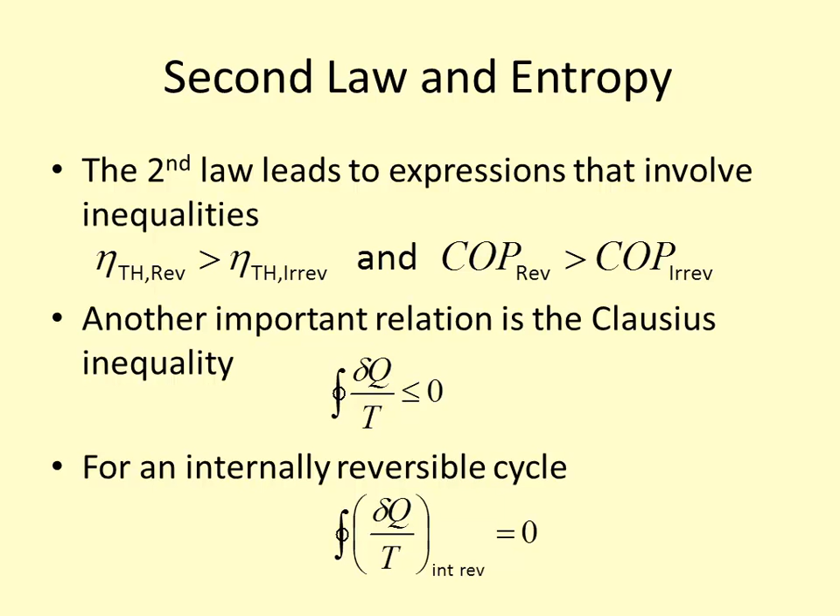So let's just imagine that we have two devices. One is what? What does that look like to you? Okay, a heat engine. How do you know it's a heat engine and not a heat pump? Okay, so there's some net work output on this reversible cyclic device. In this case, we're assuming it's operating as a heat engine, so there's some net work output, and there's a heat addition, δQR at TR, and then there's some heat rejection, δQ.

We're going to assume that this heat rejection goes straight into another system, which allows it to have some net work out or in. Okay, so we're not powering, but adding heat to this additional system with our rejection process from this heat engine. Okay, so this is an imaginary system. If you look at the system boundary right away, what do you notice?

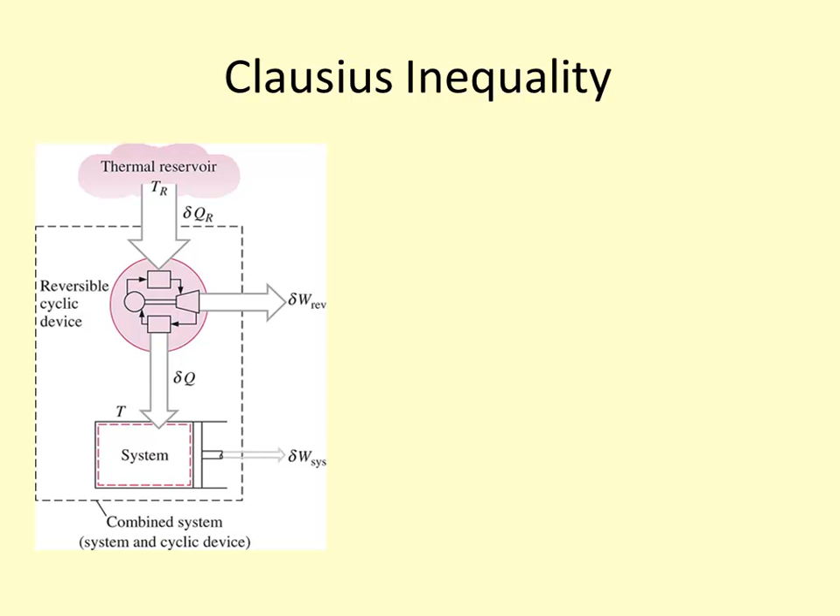Yeah, work out, no work in. Okay, there's no work in, there's a heat in, but there's work out. Okay, so would this be possible in real life? No. Okay, so this combined system is theoretical, and we're going to use it to prove the Clausius inequality.

So if we apply the energy balance to this system, we have some net work of the combined system, this del work out, is equal to this Q in minus the change in energy of this combined cycle. So we've kind of rearranged that. It would be dE is equal to del Q minus del work.

If it's a reversible cycle, then this del QR over TR is just equal to del Q over T. We're just going to call it that. If we want to solve for this del QR or this del Q over T and we substitute, then we say that the combined work of this cycle is equal to this del Q over T multiplied by TR. So we've just substituted in this del QR is equal to TR times del Q over T, minus the change in energy of this combined system.

And if we integrate over a cycle to get the total work, then the work of this combined system is equal to TR times the cyclical integral of this del Q over T. Okay, so right now we're just playing around with the math using this combined cycle to come up with something that's useful to us.

Okay, the reason this dEC goes away is why? Do you know? Okay, if it's integrating over a cycle, the change in energy of this combined system should be 0. It should return back to its initial state. So that's how that disappears. Okay, so all we've done is just take the energy balance on this combined system that's theoretical, and we've already seen that it can't possibly happen, and then we integrate over a cycle. So we're just playing around with the terms in it.

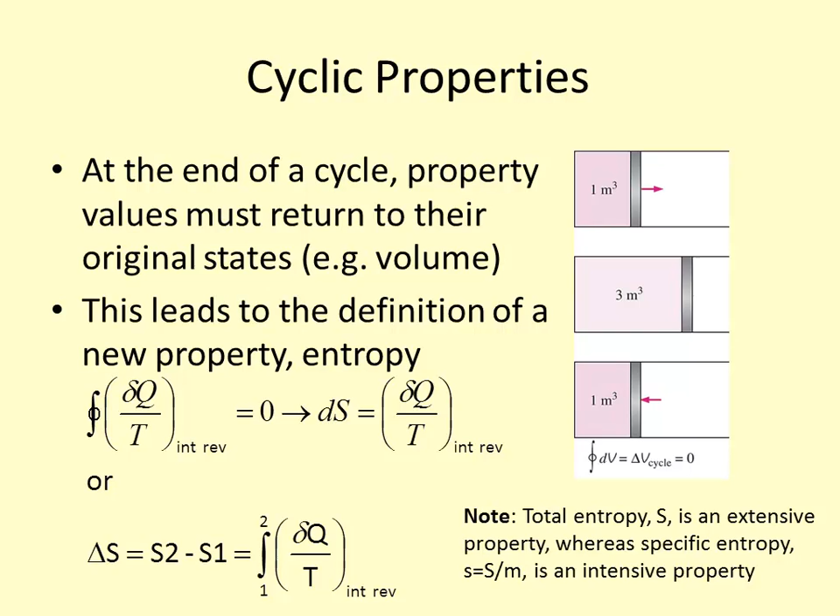Okay, so what is it? Well, it's useful to us when we perform our second law analysis, because we can assume that if a process is to occur in real life, later we'll learn that the entropy has to increase. Okay, the entropy of the system might decrease, but the entropy of the surroundings would have to increase by at least as much. So it's useful in determining whether or not a process is real, because if it doesn't satisfy this increase of entropy principle, as we'll talk about later, then it can't happen. So it's another way to put it to the test to see if the second law holds true.

We can also consider entropy to be like molecular disorder or randomness. And when we look at gases, they're in a very high energy state. So they're useful to us in terms of availability to provide energy. But because they're so disorganized and random, sometimes it's difficult to harness that energy or to use it in a way that provides value to us.

So sometimes substances that are in a high energy state also have a high entropy state. And so the release of entropy into the environment when we use these high energy materials for our system is sometimes greater than if we were to use the lower energy state materials. Okay. And again, we'll get a little bit more into this. I think chapter 7 is probably the longest chapter in the book, and we spent several weeks on it. So this is sort of just the introduction to the concept.

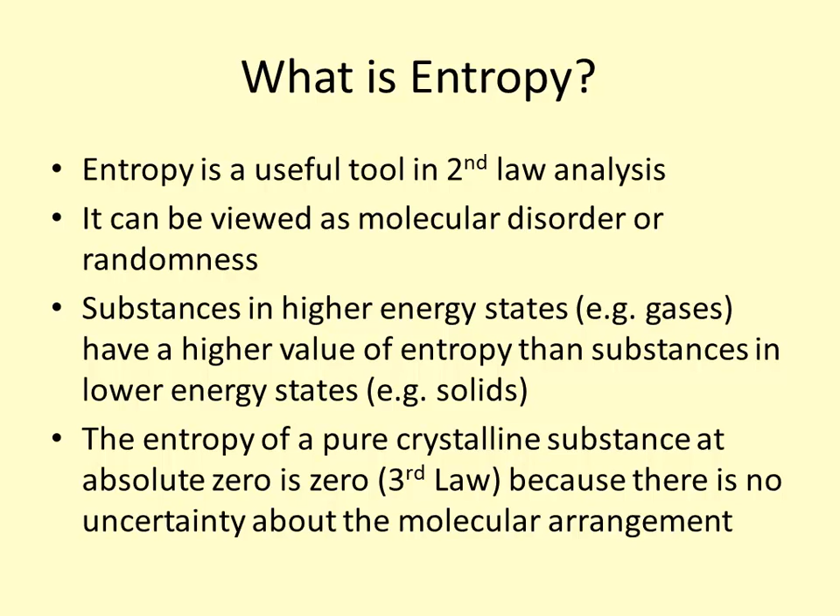Okay, so if we look at energy, even if it's in a high energy state, like a gaseous state, it's somewhat disorganized. Okay, so if we were to just put a shaft into some chamber that has gas in it, and these molecules are bouncing all around, they really have a lot of energy associated with them, but they don't combine together to start turning that paddle wheel for us. We have to harness them in some way or channel them in some way in order to provide useful work output.

And as this energy quality degrades, so as we go from a gas to a liquid to a solid, there is some production of entropy in that process. So as we go from high energy, high quality, like electrical work, to heat, there's a production of entropy in that process. So as the energy goes into a less quality form, then entropy is released into the surroundings, is created. Okay? And real processes will occur in the direction of increasing entropy.

Okay, so a hot body to a cold body, the entropy in the surroundings will increase. Okay, the entropy of this hot body is decreasing while the entropy of the cold body is increasing. Okay, so although the potato may lose some entropy, the surroundings gain that entropy. So it's going from a state of high entropy in the potato to a state of high entropy in the surroundings. So entropy is released from the potato into the surroundings.

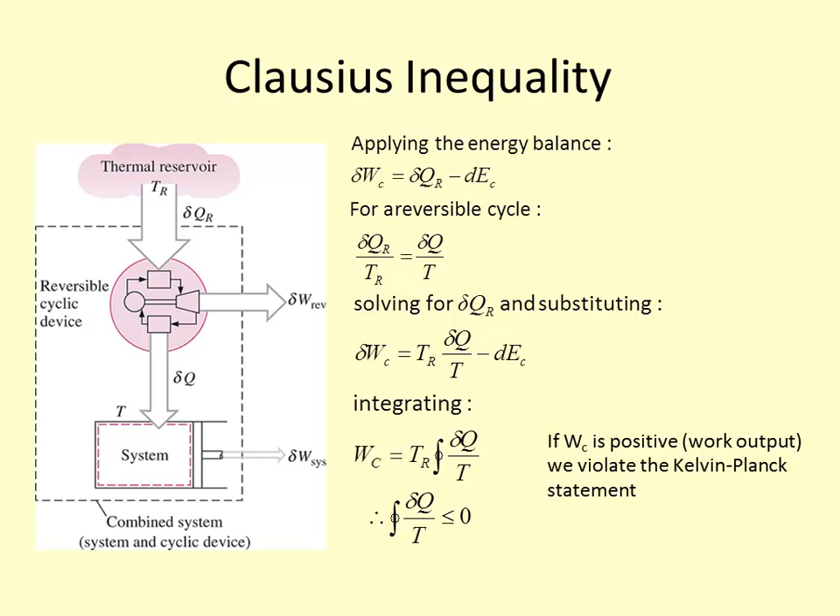Right. And there's different uses for it. So it may be accounting for the irreversibilities in the process. So if you're trying to determine where all of your energy has gone, like if you wanted to say this molecule or this group of molecules has a certain energy state, but I'm only able to get out this much energy from it in a useful form, well, that's because there's entropy and disorganization and chaos that happens when I change it from one to another. So entropy is the reason for the thermal efficiency? Is that what you said?

No. Okay. Well, look, entropy is a result of processes that have inefficiencies, we will say. Thermal inefficiency, or what? I mean, the inefficiency of the... Okay, I'm gonna leave it alone, and continue to try to put the pieces together. So if you said that it resulted from that inequality that just kept showing up, then how were they analyzing it? How's it pertinent, if it was something that was discovered after the use of this system? I don't know that it was much after.

As all of these equations, first law, second law, third law, zeroth law, were coming about, it was in the same general time period, over maybe less than 100 years, that people were trying to figure out how to analyze systems, how to determine what the inefficiencies are and where they come from. So it all came about together. It wasn't that they were applying all of these equations for a long time, and then somebody was like, hey, let's call this part entropy. It evolved as they grew a greater understanding of how the processes worked and what the results were.

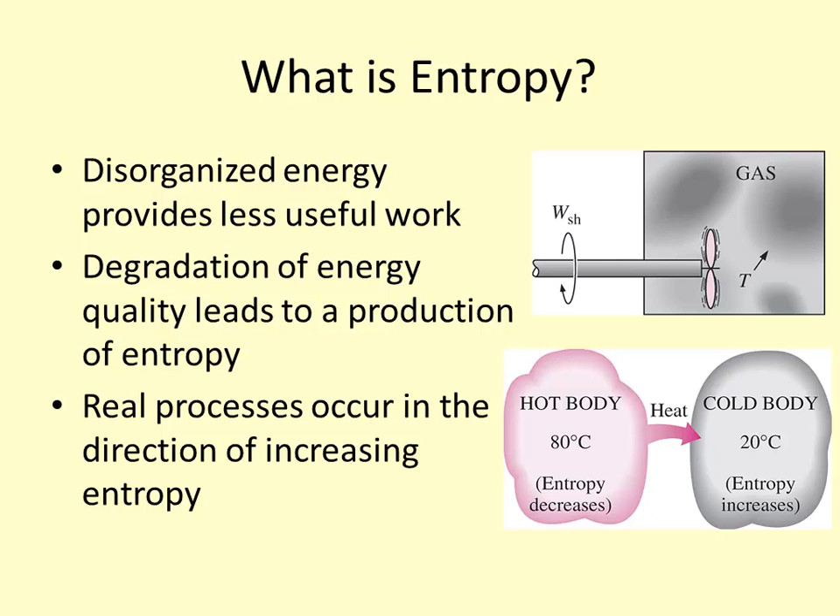Okay, so there's special cases where we can apply this. If it's an isothermal, what does isothermal mean? Constant temperature, internally reversible process, so the system itself can be returned to its original state.

Then we can take this temperature outside the integral and we just have 1 over T times the integral of δQ, which just reduces to Q over T. So the change in entropy for an isothermal system that is internally reversible is just Q divided by T. So the amount of heat transfer divided by the temperature at which the heat transfer occurs. So heat transferred to the system will increase entropy, and heat removed from the system decreases the entropy.

So entropy isn't an actual value, it's just change of entropy? Entropy is a value. Oh, okay. You can't measure it, you can only calculate it. Okay. So think about this physically, that if you're adding heat to a gas, or to a substance, maybe it's in a liquid form, what eventually happens? It evaporates, the molecules are moving around, they have higher energy, so the entropy will increase. Similarly, if you remove heat from it and it condenses, it's in a lower energy state and there's less entropy.

Okay. So similar to heat, a system doesn't possess heat. We only recognize the amount of heat that's transferred from one system to another. Entropy operates in a similar manner, that a system doesn't possess entropy. You can't measure the amount of entropy, just like you can't measure the amount of heat, but we recognize the entropy transfer as entropy is transferred from one system to another.

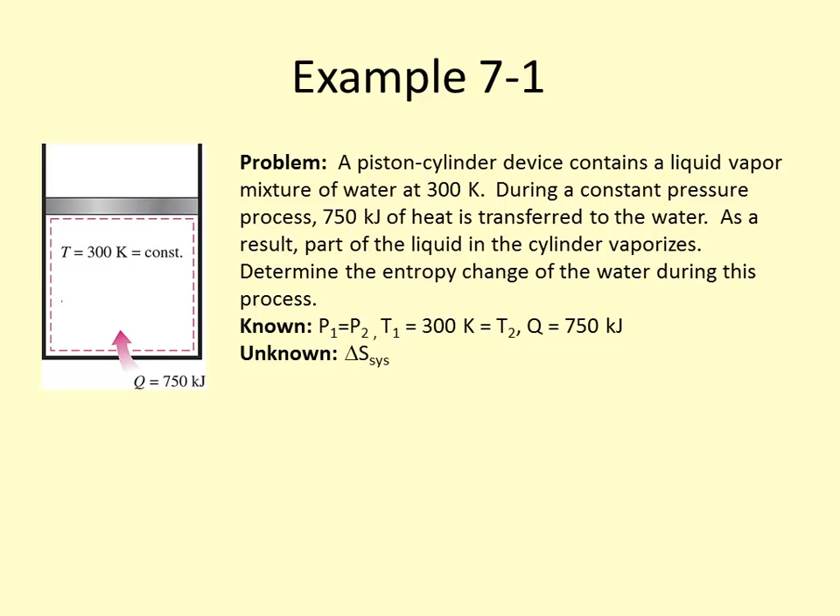What would happen if this temperature was not constant? Okay, we would have to integrate using that integral up there, δQ over T. We would need to know the relationship somehow between heat transfer and temperature and then perform the integration. But because it's isothermal, the temperature is constant, we can do this. If the temperature is not constant, you can't apply this equation. You have to go with the beginning one. Okay, let's do another one.

Air is compressed by a 30 kilowatt compressor from P1 to P2. The air temperature is maintained constant at 25 Celsius during this process as a result of heat transfer to the surroundings at 17 Celsius. Determine the rate of entropy change in the air. State the assumptions made in solving this problem. Okay, so what are some of the assumptions that we can make? Okay, steady flow. What else?

Say that again. Isothermal. What else? The flow rate is constant? Yeah, that's sort of implied in steady flow. What's our working fluid? Air. Oh, yeah. Okay, air is an ideal gas. Okay, anything else?

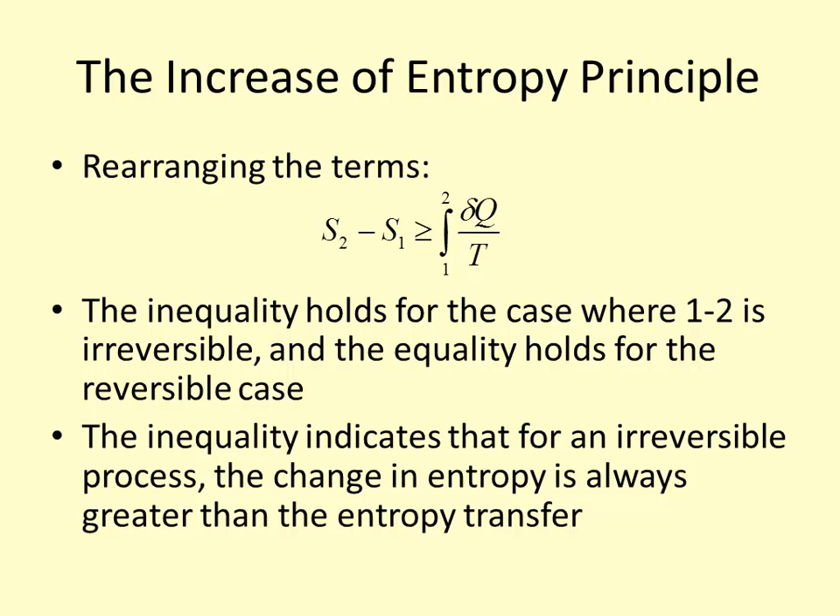And if it's an irreversible cycle, then it's going to be greater than. Okay, so for an irreversible process, the change in entropy is greater than the entropy transferred between those two. So there's always some entropy created or generated during a process. So the change in entropy of the system is equal to S2 minus S1, but it's equal to this del Q over T plus some other term. Okay, so we have entropy generated during any irreversible process. And it's a property of the process itself that determines how much entropy is generated.

Okay, so imagine that we're performing some process on the system, and in one case, we do it with minimal inefficiencies. So we try to eliminate friction, we try to eliminate any heat losses, we try to eliminate any non-quasi-equilibrium oscillations within the system that reduce our efficiency. Okay, as we try to minimize those inefficiencies, we're minimizing the amount of entropy that's generated during the process. As we have greater inefficiencies in our process, then this entropy generation term increases.

Okay, so a system can go from state 1 to state 2 in many different ways, and this change in entropy is always going to be the same, because it's a property value. You can look it up in the tables; S2 minus S1 at a beginning and an end point is always going to be the same. But the amount of entropy generated will change depending on the process that you use to go between S1 and S2. Any questions on that? Yes.

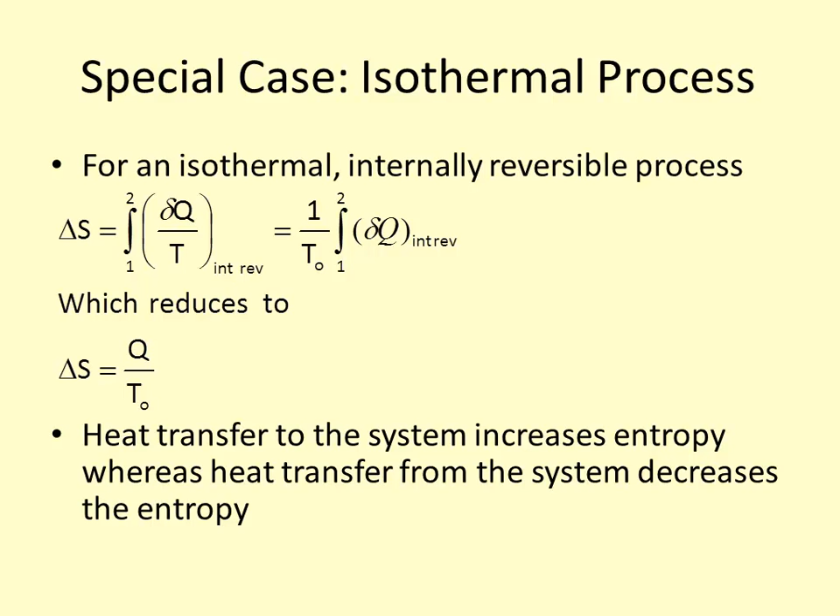Yeah, and again, that would just depend on the functional relationship between Q and T. In this case, it's Q over T. It's a 1 over T relationship, so that's how it varies. But yeah, if it's not an isothermal problem, then it's some other relationship.

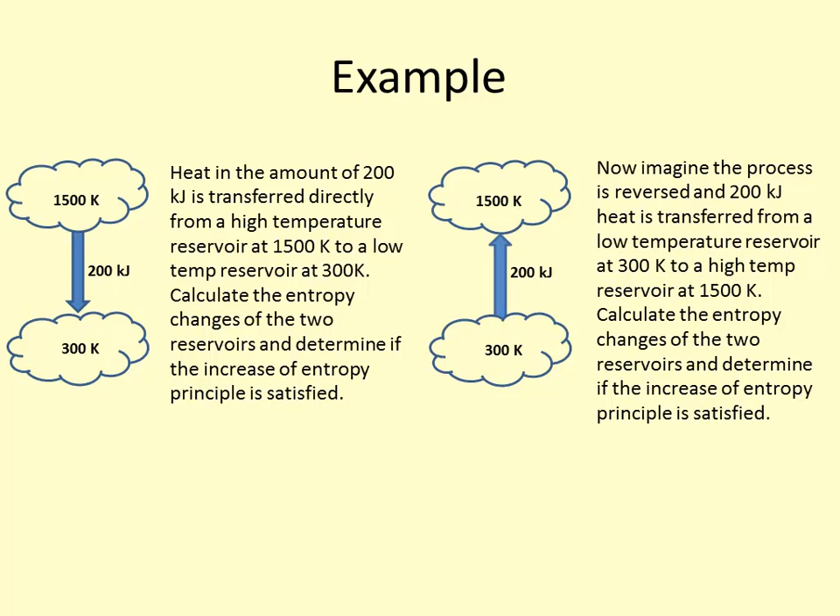This stuff will be on our exam. Yeah, but it's going to be stuff like this kind of a problem where, I'm not guaranteeing that, but it's going to be more conceptual and testing your understanding of what is entropy, what does it represent, and how would you figure out whether something satisfies or doesn't satisfy this increase in entropy principle.

So I'm not going to give you a functional relationship between Q and T and how you figure out the integration, and I may do that on the final, I don't know, but because we're just talking about this and because I fully understand that this subject is confusing, and it's very different from how we look at energy.

Because in energy, you can't create energy. You can't generate it. You can change forms. But with entropy, you can generate it. You can bring it out of nowhere because you have to perform a process, but it's always increasing. There's always some entropy created during the process.

And I guess the important thing to remember is that entropy is not a physical thing that you can see or look at or hold. You see the influence of it in the environment, in the degradation of quality of energy, or in the increase of randomness and disorganization. So you kind of have to think in more abstract terms.

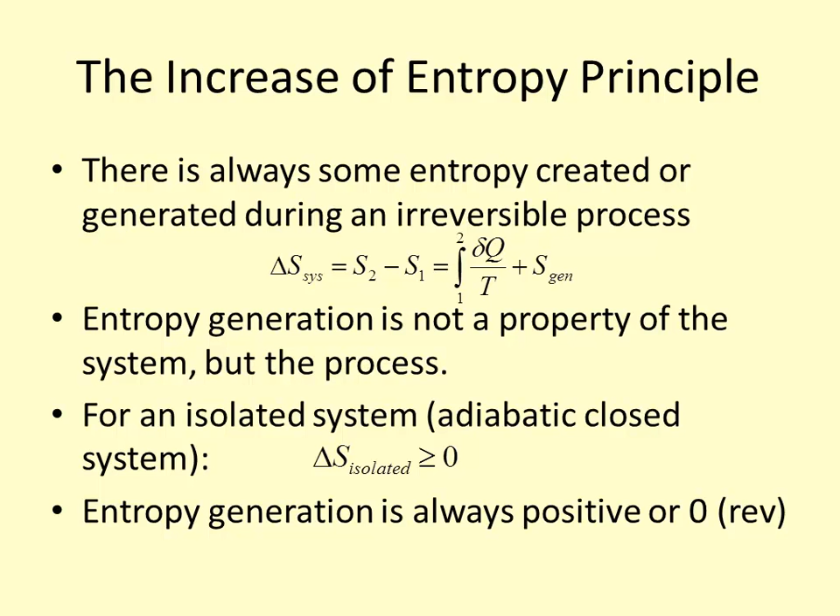Because it's not a concrete something we can feel. You know, we can experience heat, we can see volume changes, we can hold a mass in our hands. We can't really experience entropy physically. I mean, we do every day, but we don't know that we're experiencing it. Okay.

So for entropy generation, if we're looking at a system and its surroundings, the entropy generation always has to be greater than or equal to 0. So the universe, which is all of the systems and all of the surroundings combined into one, can be considered an isolated system. And yes, the entropy of the universe is always increasing.

So again, just important to note that an individual system can have a decrease in entropy, but the entropy of its surroundings will increase by an amount equal to or greater than that amount. So if the entropy generation is 0, meaning that the entropy of the system decreases or increases by the exact same amount as the entropy of the surroundings, then it's a reversible process. So there's no irreversibilities adding to the entropy of the universe. Okay, so there's no friction that causes heat, and there's no heat loss.

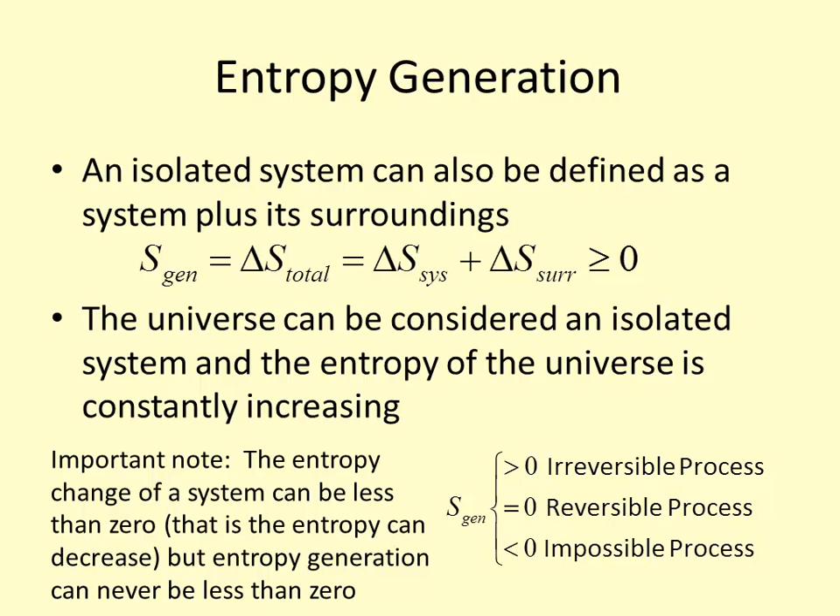Okay, but it can never be negative. You can never destroy entropy. So it can be 0 for a reversible process, or greater than 0 for all real processes, but it can never be less than 0, negative. Okay, let's do another example.

A heat source at 800 Kelvin loses 2,000 kilojoules of heat to a sink at either 500 Kelvin or 750 Kelvin. So let's determine which heat transfer process is more irreversible. So which one has the greater entropy generation?

Okay, so if we want to determine the entropy generation, we have to look at our system and the surroundings. So we're going to assume the system is the source and the surroundings is the sink. Okay, so I don't need to draw that picture, it's already in there. Okay, so the entropy generation in A is equal to the change in entropy of the source plus the change in entropy of the sink. So the change in entropy of our source is what?

Okay, negative 2,000 kilojoules divided by, what is our temperature at which it's occurring? 800 Kelvin. Plus we have 2,000 kilojoules going into our sink at a temperature of 500 Kelvin.

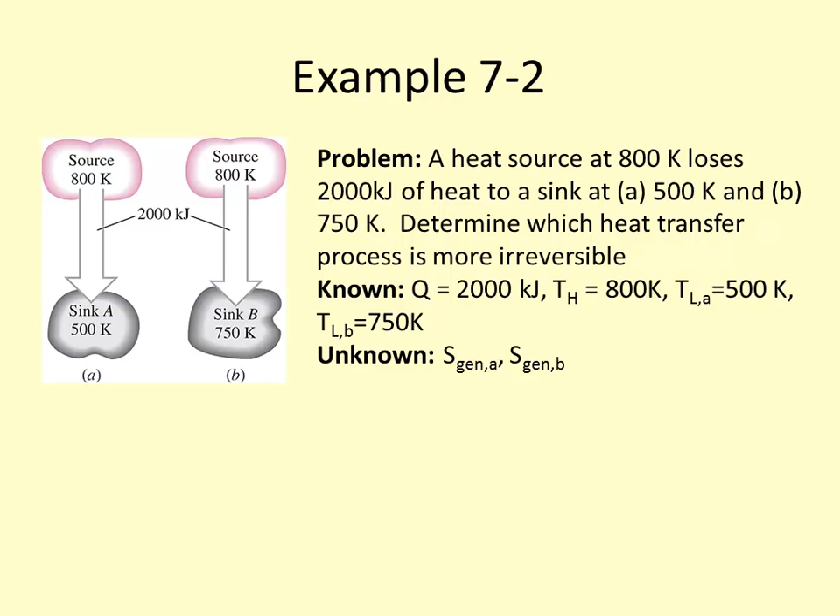So again, we can only apply this when it is an isothermal case or when the temperature of the source or the temperature of the surroundings are constant. So it occurs at a constant temperature. Okay, additional remarks about entropy. As we said during our study of the second law, processes can't occur in any direction that they want to. It's governed by the second law. And a process has to occur in the direction that complies with the entropy generation principle. So in other words, entropy generation has to be positive, or equal to 0 for a reversible case.

Okay, so if a process is to occur in real life, not just on paper, it needs to satisfy that principle. So it's another statement of the second law that there's a directional quality to our energy transfer. It's also not a conserved property. So when we think about energy, energy in minus energy out equals energy change. Well, for entropy, it's entropy in minus entropy out plus the entropy generated is equal to the total entropy change. And that value always has to be positive when you consider the system plus the surroundings.

If it's an ideal reversible process, it will be 0, but everything else has to have a positive net entropy change when you consider the system and the surroundings. Or entropy generation has to be greater than 0. And entropy is of concern to us because the more inefficient our systems are, the less usable work we get out of them. So we want to study irreversibilities in entropy to know whether or not our process is as close to ideal as it can be. So anytime we're generating entropy, we have a process that has inefficiencies, irreversibilities associated with it, and we want to try to minimize that.

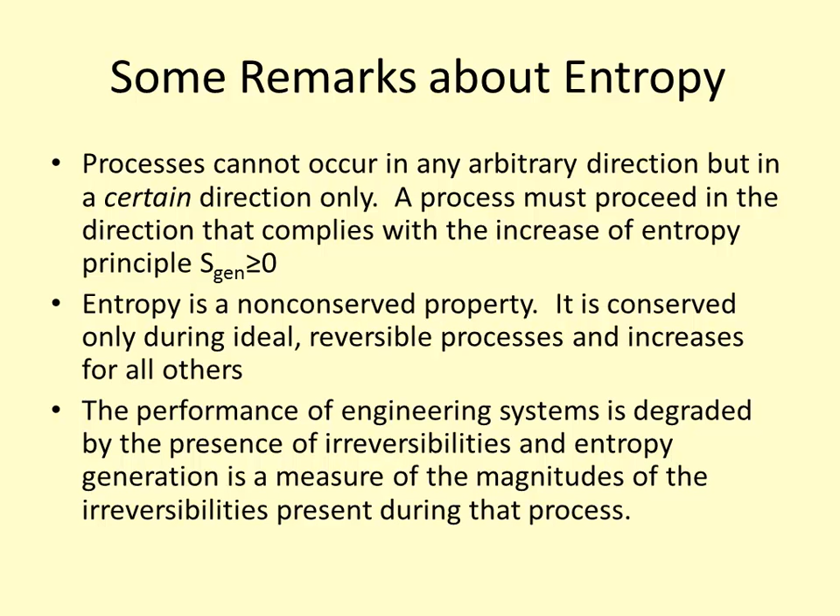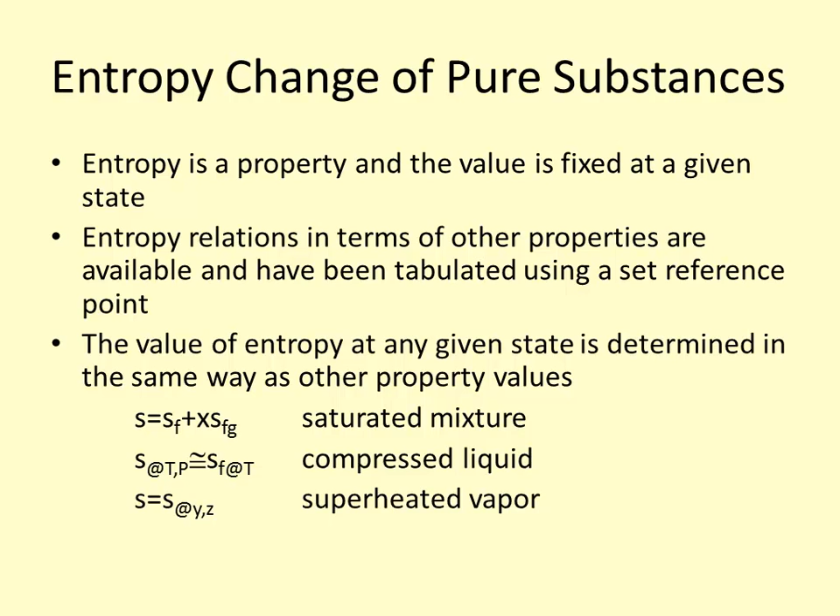So it may be a more efficient system, but if we compare it to another system that has less entropy generation, possibly that's the system we want to go with. So, again, entropy is a property value, and just like any other property value, we can look it up at fixed states. The same relationships exist as they did for other property values, where under the dome, if it's a saturated mixture, entropy is equal to sf plus x sfg. So we would treat it the same way we would any other property to look it up and calculate entropy values.

Under the dome, you can see that there need to be two independent intensive properties. So temperature and pressure are still dependent under the dome. You can't use temperature and pressure alone to pick the state. The same thing we've done for all other property values. So I'm going to kind of skip through this.

We have a new chart that we can look at called the TS diagram. We previously looked at Tv diagrams, TP or Pv diagrams, all three of those. But now we can look at TS diagrams, and it does provide us with some useful information, because at a glance we can see during a process how much the entropy increases from one state to another as we go from point to point along that process. We'll look at some of these in more detail as we start talking about specific cycles and how they operate in terms of entropy. So let's do another example problem.

In this case, we are going to look at a system. It's not necessarily a constant temperature system, but we're going to treat entropy as a property value, as it is a property value, and practice using the tables to look it up.

So let's imagine that we have a rigid tank divided in two parts, equally in half. One part has a compressed liquid at 300 kilopascals and 60 Celsius. The other part is a vacuum. At some point, we remove that partition, and everything goes from one side to fill the entire chamber.

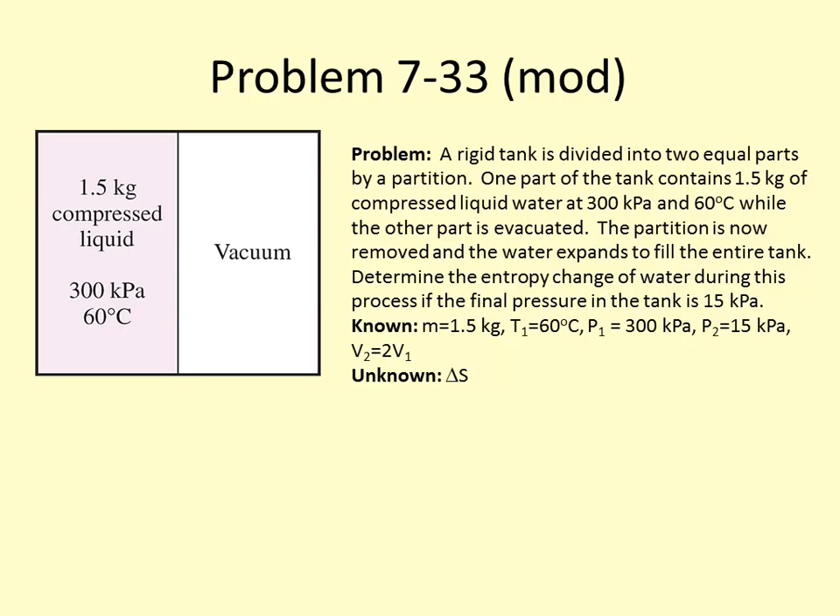The surrounding temperature. Okay, we would need to know the surrounding temperature, and then we could use our energy balance to calculate how much heat was lost during this process. Okay, there's no work interactions, so all we would have would be a heat transfer out of the system, because our entropy is decreasing. So if heat transfers out, then we would have some heat transfer into the surroundings, and we could calculate that and determine the entropy generation.

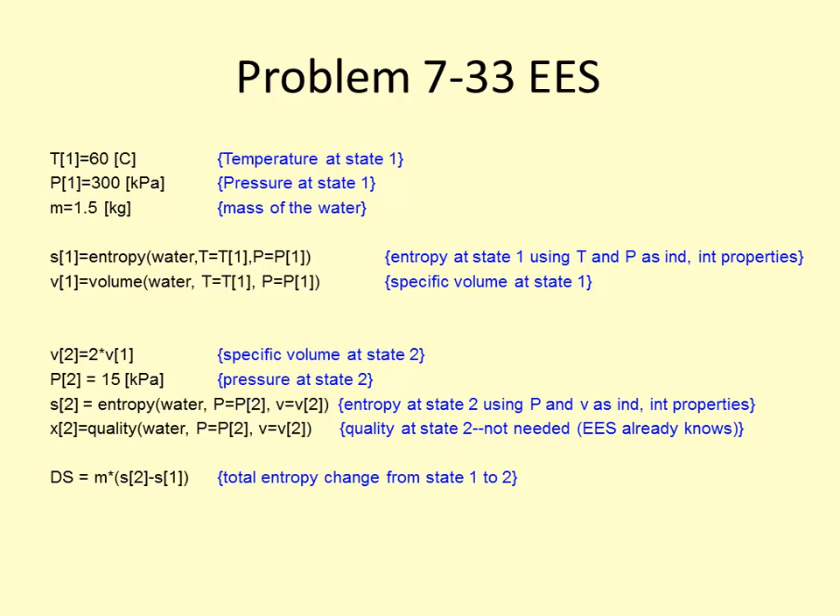So this is the problem in EES. I'm not sure what, I did that a long time ago. I think the students have some problems to do with EES, but just of interest. If you don't use EES anymore, I don't know why not, because it's much easier to look up property values with EES than the tables, but you don't have to, just if you want to.

Okay, so let's talk about the exam. Again, it's going to cover everything from chapters 1 through 6 plus today's lecture. However, the focus is going to be on material we've covered since the last exam. It's closed book, closed notes, and you get 2 sheets, front and back, of your own prepared notes. I've passed out this equation sheet. This is what will be used on the exam. So I've given it to you to help you study and become familiar with the equations. You can write on that and use it as one of your sheets or not.

Any property tables will be given to you if you need them. I think one thing that tripped people up on the previous exam is they would try to do a problem and they realized they didn't have a property table for it the way that they were trying to do it, so they started assuming values. If you have to assume values, it means you're doing it wrong. Because I will either give you the table or I will give you the value or some chart where you can look up the value. If you're assuming values, then that's not the right way to solve those problems. Just a heads up on that.

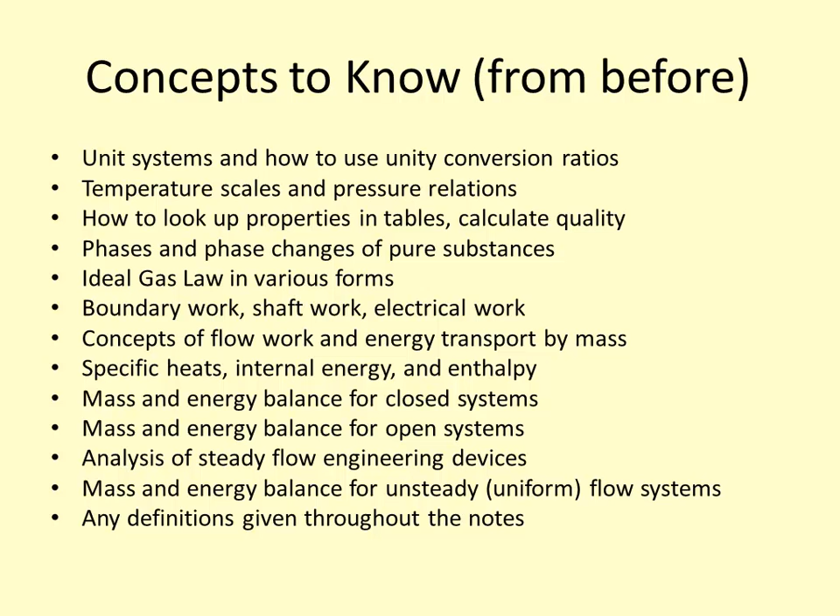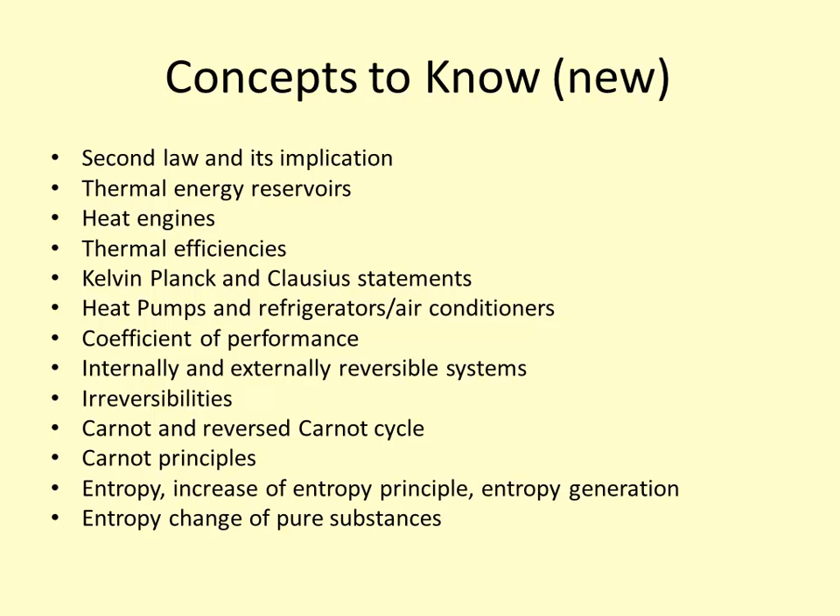Concepts to know from before. So these are all the things that we've done up through chapter 5. You should be very familiar with doing all of these things already. If there are things that you struggle with, talk to another student, talk to me, make sure that you understand how to do these things. New things that we've talked about since last time were the implications of the second law. What is the second law? What does it mean? How does it help us, or how is it useful to us? And then talking about energy reservoirs, heat engines, thermal efficiencies, the Kelvin-Planck and Clausius statements, which are restatements of the second law, heat pumps, refrigerators, COP, reversibilities, Carnot cycle, and then today's topics, the entropy principles. So increase of entropy, entropy generation, and then entropy change of pure substances.

So the problems that combine concepts from chapter 5, which is the steady flow devices, and chapter 6 are very good problems to expect on the exam. Okay, so we've done a few homework problems like that. We've done some problems like that in examples in the class. So these are some good examples, 56, 57, 110, of types of problems that I like to use on the exam. I'm not going to put these problems on the exam, but those kinds of problems. And then anything that requires you to have some knowledge of reversible versus irreversible cycles. I'm not going to ask you to do any of the proofs that were in the chapter. I think that doesn't test your understanding of the concepts very well, just your ability to memorize proofs.

And then there will be at least one problem dealing with entropy. So when I say at least one problem, I mean one workout problem. And then there may be some true or false questions or short answer problems that also deal with entropy. But at least one of the problems on the exam will deal with what we've talked about today. So if you're unclear on how to do isothermal entropy problems, looking up entropy in tables, calculating the entropy generation, I'd really focus on that and try to make sure you understand it. If you have questions, come talk to me. I don't expect you to fully understand how the Clausius inequality came about, or any grand analysis of complicated systems dealing with entropy. But I would expect you to be able to do some of the types of problems that we did in class today.

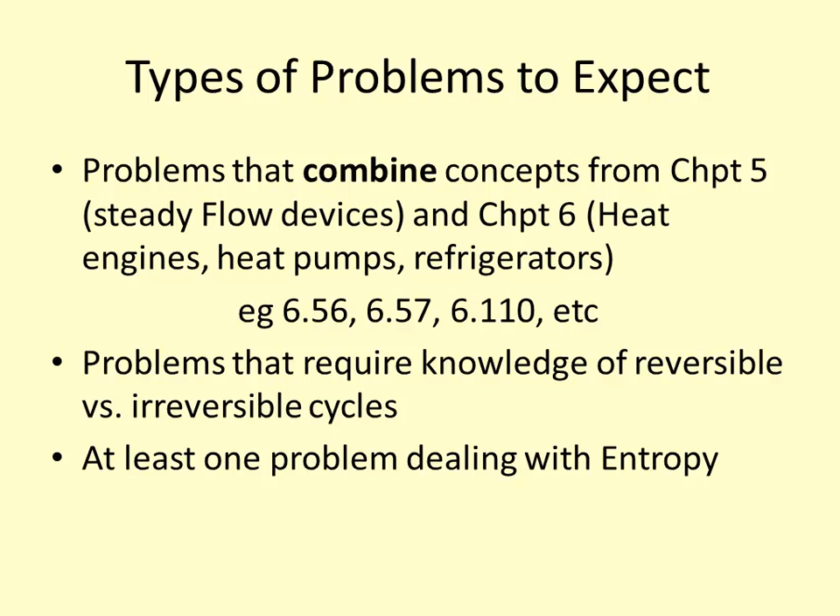Any questions? Don't worry, you will do great. You've done great all semester long. Keep up the good work. Keep studying. Don't change anything. So don't think that because you've done great before, you can stop studying. Keep up the good work, and we'll see you on Tuesday. And if everybody is here early,